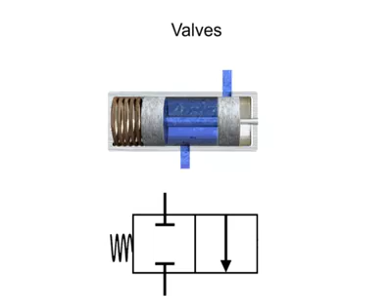In most air and hydraulic fluid power circuits, valves are used to control the direction, rate, and pressure in fluid lines. Control valves for these functions can be purchased with either manual or solenoid actuators. In a manually actuated valve, the internal cylinder is shifted by hand using a lever, push button, plunger, or other manual actuating device.

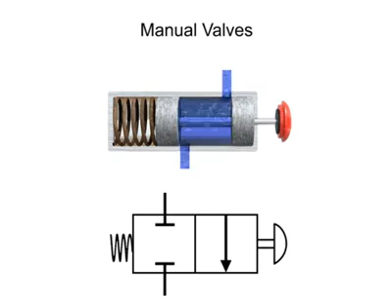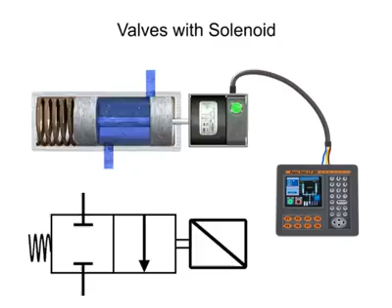By contrast, valves with a solenoid actuator respond to an electrical signal for shifting. With electrical control, machine cycles can be set up for automatic sequencing, and operator control can be exercised from a remote location. Solenoid valves are said to be either direct or pilot-operated.

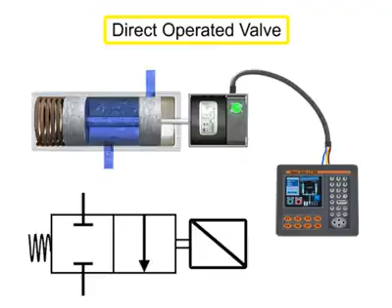A direct-operated valve is shown here. A pilot-operated valve has a pilot and bleed orifice and utilizes line pressure for operation.

This is a pilot-operated relief valve. When the solenoid is energized, the core opens the pilot orifice and relieves pressure from the top of the valve piston or diaphragm to the outlet side of the valve. This results in an unbalanced pressure, lifting the piston or diaphragm off the main orifice. When the solenoid is de-energized, the pilot orifice is closed and full line pressure is applied to the top of the piston or diaphragm, closing the valve.

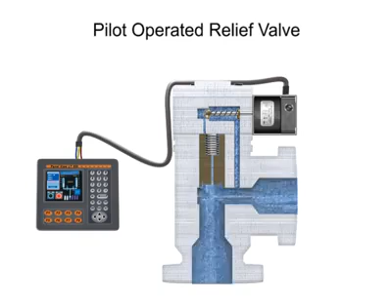Most directly operated valves also come in pilot-operated versions and are designated by a triangular graphic symbol.

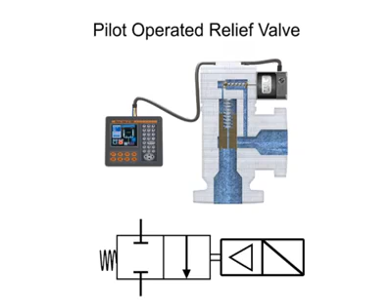A single solenoid valve has one solenoid to assist in valve operation. The valve spool shifts when the solenoid receives an electrical signal and is energized. The valve will remain shifted as long as electrical current is applied to the solenoid. Once the electrical current is removed and the solenoid is de-energized, the valve returns to its normal position by spring force.

Fluid circuits designed to use single solenoid valves must maintain electrical current in order to keep the valve in its shifted position.

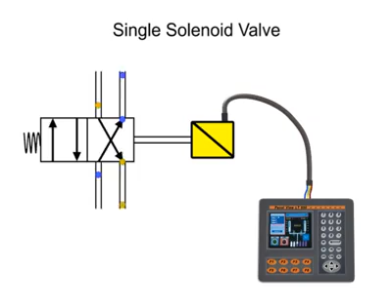When the first solenoid is energized, the valve spool shifts into the first position. Even if the first solenoid is de-energized, the spool remains shifted. This is because there is no spring to return the spool to its original position. Energizing the second solenoid will send the valve to the second position. Even if the second solenoid is de-energized, the valve will remain shifted until the first solenoid is re-energized.

Since there is nothing holding the valve in the shifted position other than friction, these types of valves should be mounted horizontally to avoid self-shift due to excessive airflow or vibration.

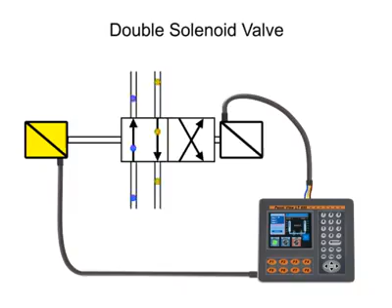If both solenoids are energized at the same time, the solenoids will work against each other and may cause the spool to become stuck, electrical burnout of the solenoid, or an overload of inrush current to the circuit, any of which will cause severe damage to the system or valve.

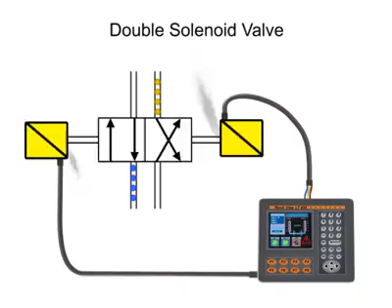A three-position valve has a spring-centered neutral position for its internal spool. Because of the centering springs, it's necessary to hold current on one solenoid or the other to keep the spool in one of its side positions.

When each solenoid is energized, the valve shifts to the appropriate position. Anytime both solenoids are de-energized, the valve spool will spring to center and stop the fluid flow. Therefore, a three-position valve requires a maintained electrical signal for its operation.

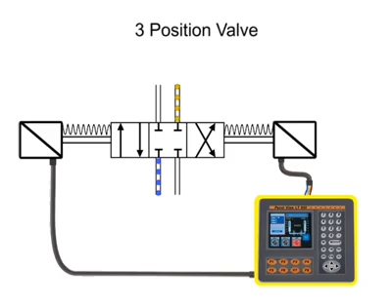As before, energizing both solenoids at once may cause damage to the valve or to the system. To prevent this from occurring, electrical circuits should be designed to make it impossible to have current on both solenoids at the same time.

Solenoid valves are used in both hydraulic fluid and air systems to control direction on cylinders for deceleration or speed control and pump unloading or pressure control. The physical appearance of each component will vary greatly depending on brand, size, and type, so care should be taken to reference the appropriate manufacturer's guidance when choosing a solenoid valve.